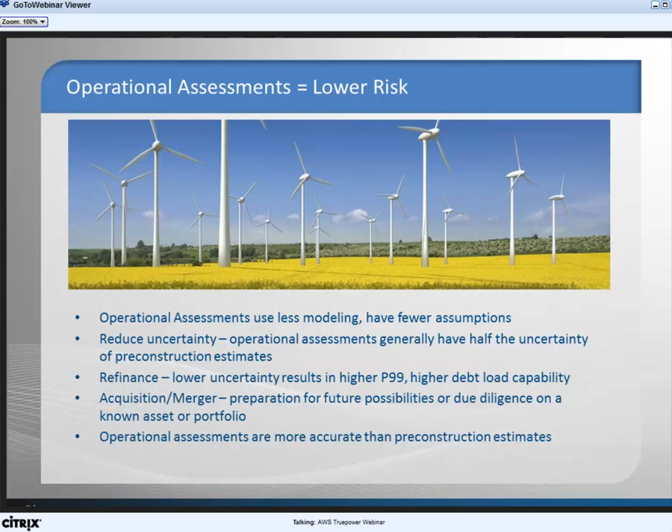Another driver we are seeing is very strong activity in the mergers and acquisitions market, where owners are packaging up wind and solar farms with more accurate energy estimates and selling them as a portfolio with an overall lower uncertainty. There are a few interesting market trends that are leading to strong M&A activity and market consolidation. The most prominent factor is the pending expiration of the PTC at the end of this year. Now with the election over, hopefully the coming weeks will lend more insight into the status of the wind tax credits, but the uncertainty looming over the wind industry has led to reduced pipelines in 2013.

On the other hand, market uncertainty aside, the wind market is actually becoming more attractive to larger, risk-averse companies and more traditional investment methods. The market is becoming more mature and has a track record now that allows insight into performance and potential risks. The cost efficiency of the technology is improving, while the demand for many companies to include renewable energy as part of their portfolio remains strong. This is leading to large, established companies increasing their share of the market, or in some cases entering the market, through acquisition of wind assets or companies with wind assets.

While the solar market is not experiencing the same level of uncertainty regarding government policy or the same level of M&A activity, many of the solar assets are packaged together with wind assets in portfolio acquisitions. In fact, adding solar assets to wind portfolios can further decrease the uncertainty of the entire portfolio as part of the portfolio effect. As Lisa mentioned, this will be a topic we'll cover in depth in our next webinar. So, whether it's a plant refinancing or a straight acquisition, a new operational energy assessment should be conducted in order to provide a more accurate picture of the energy production and reduce overall uncertainty.

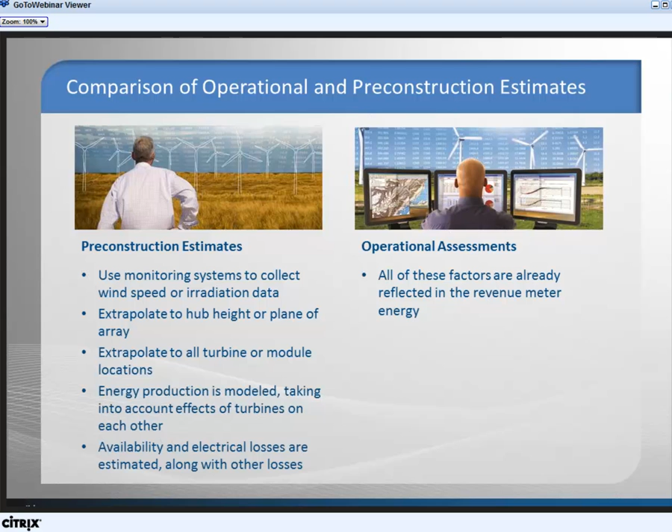The revenue meter data at each turbine provides insight into all of these factors, and therefore, the uncertainty moving forward is greatly reduced. So, Brian, can you take us deeper into the analysis? When in the project life can we do an operational assessment? Well, Josh, some types of operational assessments, such as performance testing, can begin as soon as the plant's operational. The type of assessment we're going to discuss today requires that the plant be operating in a stable manner.

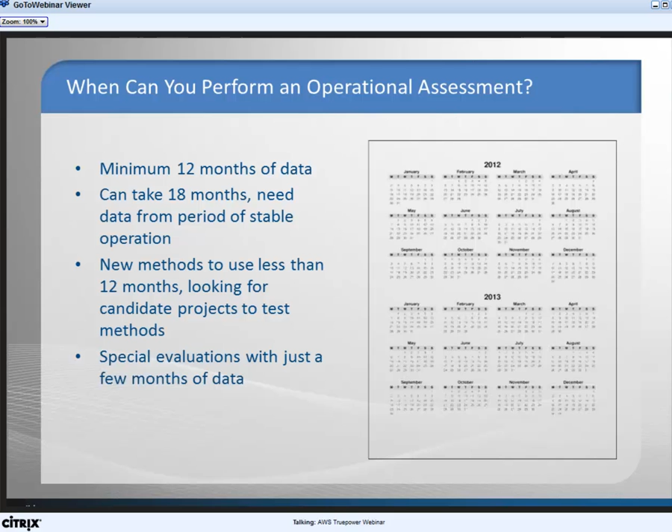Just like resource assessments that are conducted before the wind or solar project is built, operational assessments generally require 12 months of data. However, if you consider the initial plant downtime and startup issues, commissioning issues and such, it might take up to 18 months of operation to get a year's worth of usable data. The same is true for solar projects. It might take more than 12 months of data collection to generate a complete one-year data set. For example, a larger project might be commissioned in several phases, or regions with snowfall may lead to gaps in the data records. Let's look at the information that's required to do an operational assessment.

As we mentioned a few slides back, revenue meter data is one of the primary building blocks that we use in our operational assessment. In addition to the revenue meter data, we need availability data, not just the turbine availability, but the measurements from the SCADA system used to calculate the turbine availability. The turbine warranty agreement makes distinctions for categories of time or energy that do and do not count in the contractual availability definition. We use this turbine availability data to calculate a plant level availability that takes into account the lost time or energy that might not necessarily count against the turbine manufacturer, but is needed to determine the time or energy actually lost during operation.

What we really need to know is how much energy could have been made, as if the project were fully operational. In order to determine this, we need to account for all the time or energy lost, not just contractually allowed time or energy. Now, we've mentioned both time and energy types of availability accounting. Many turbine manufacturers are now accounting for energy lost, not just time lost. Energy-based parameters yield a more accurate regression for this type of analysis than the older time-based parameters.

Why is energy more accurate? It's because time does not equal energy. The energy lost during an hour when the turbine is down for maintenance, when the wind is only blowing at 2 meters per second, is probably 0 megawatt hours. But the energy lost when the wind is 15 meters per second will be much higher, probably the full rated capacity for all the turbines that happen to be offline. But one of the things to take into consideration is that these energy-based parameters can be biased if they're using the advertised power curve. Energy loss calculations will be much more realistic if they're based on the average of the power curves from turbines tested at that particular site.

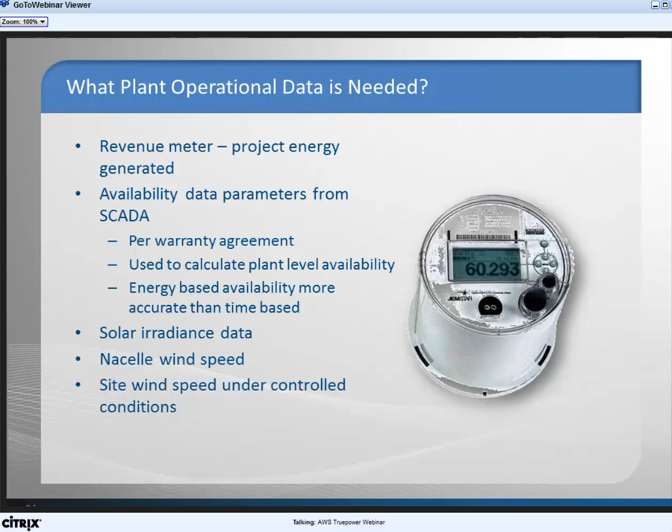We also look for temperature and wind speed measurements, as they are key elements in the analysis. The maintenance practices on the instrumentation itself are also evaluated to ensure good data quality. Operational reports are also another important input, other than the actual operating data.

Good operating reports summarize project activities. They provide information on what actually happened at the site during a given period. Reports on a monthly basis are the most common. Turbine and module as-built coordinates are required, so we can include them in our report. The coordinates do not necessarily play into any of the calculations. We simply use them to show the farm layout in relation to the local topography, and also to show the relationship of the equipment to the on-site meteorological instrumentation.

Finally, we need our reference station data. The client is only involved with this aspect if we're using his on-site data. Otherwise, we evaluate different sources of public and private ground-based or model data for use for our reference stations. If we're using on-site meteorological data, we also need the commissioning forms for the equipment that was used to collect the data. It helps us understand what equipment was used and allows us to verify that the equipment was properly set up.

For solar projects, pretty much the same requirements apply. We like to see the operational reports and the commissioning documents for the plant equipment as well as the meteorological equipment. As far as solar reference data goes, we're looking at the same parameters. Ideally, we look for reference stations with good quality solar radiation, temperature, and wind speed measurements.

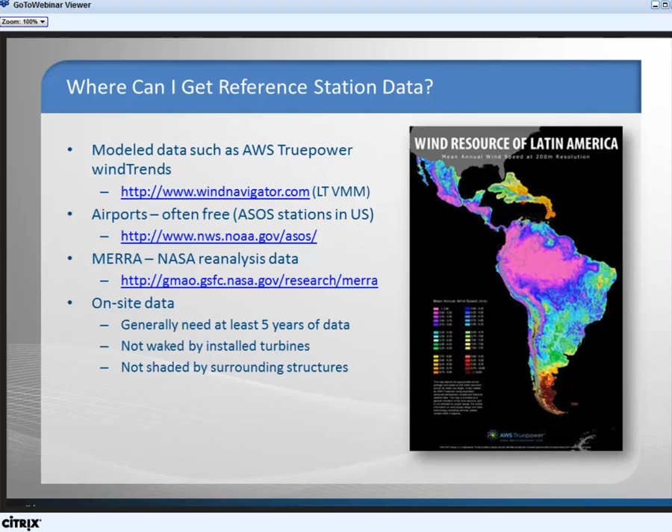If considering on-site met data, this becomes one of the most important checks. You need to confirm that the wind speeds before and after the installation of the wind turbines are not significantly impacted by the wake of the turbines. And that's done by looking for proper tracking and correlation with some off-site regional reference.

We've talked about all the data inputs. Now let's discuss how they're used to generate an energy estimate for the site. Here's the 50,000-foot view. We make corrections to both energy and wind speed to make them representative of their full potential, normalizing to allow the best use of our linear regression. For energy, this means we're correcting for availability and curtailment, and that's to arrive at an idealized energy as if the farm were operating at 100%.

For wind speed, we make an adjustment to account for seasonality, the differences in temperature and pressure as compared to other times of the year. Now, this regression could be done on any of several different timescales, depending on what data is available. So let's look at the different analysis periods we could use.

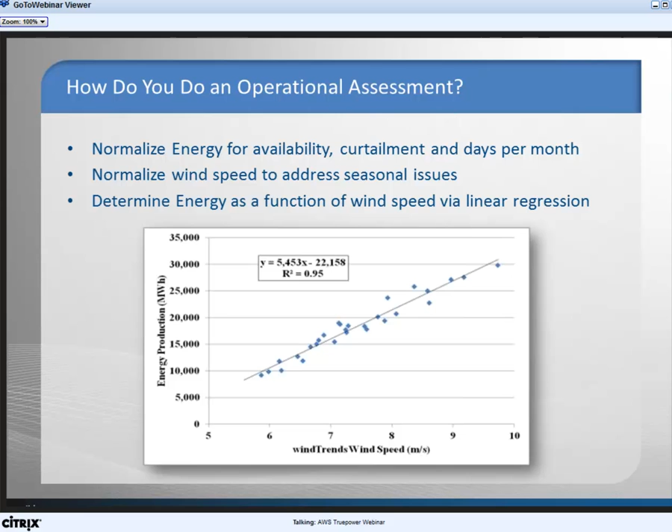For us, we found that the use of monthly data is the best, and it's primarily for 2 reasons. First, it's most often the data that's available. A lot of times we're in a data room. There's summaries available in monthly reports, especially for finance jobs, and it's the information we're most likely to come by.

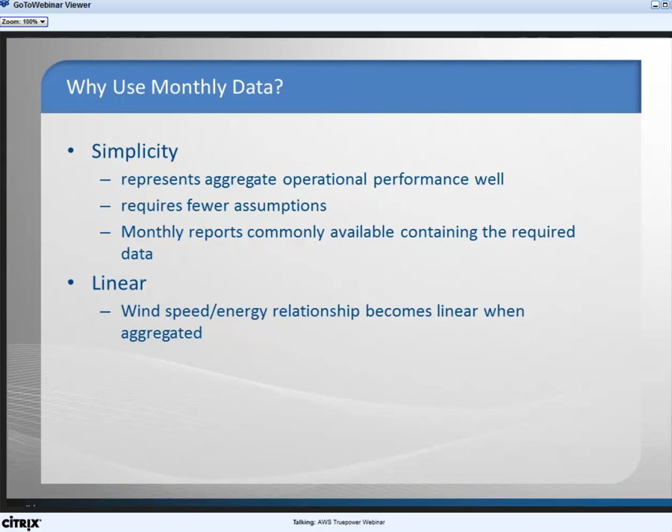Second, because the analysis can be done with a simple linear model. This is easier to look at. This is easier to understand if you're actually looking at some graphs. So let's look at some examples.

Here's just 6 months worth of wind speed and energy data from an example wind farm summarized in 10-minute, daily, weekly, and monthly intervals. It is clear to see that the monthly and weekly data are linear. That's the 2 on the bottom. And that the daily and 10-minute data follow the power curve, and that's more represented by the S-shaped curve that you would see for a turbine.

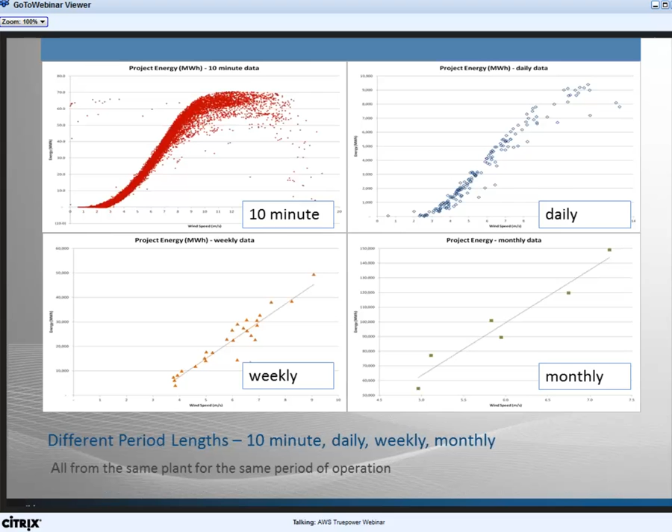As Josh explained in the beginning, our reports are often used for refinancing or to establish equity value as part of an acquisition or merger. It is important that the method used be understandable and comparable to industry norms. Our operational assessment is designed with these key factors taken into consideration.

There is more variation in the weekly time series data than there is for monthly data, and that's just because it's averaged over a longer period of time. For this analysis, we're basing future estimates on the fact that the period used is representative of similar periods of historical data. The monthly data best supports this assumption.

Now, we've discussed the data that's used. Let's dig a little bit deeper and talk about the mechanics of the analysis, how the process works, and how we're actually going to do the adjustments and calculations. So how does the process work? The process can be generally described, and we actually describe it the same way for our pre-construction estimates, as measure, correlate, predict. And some of the major steps for each one of those is outlined next to each one of the topics.

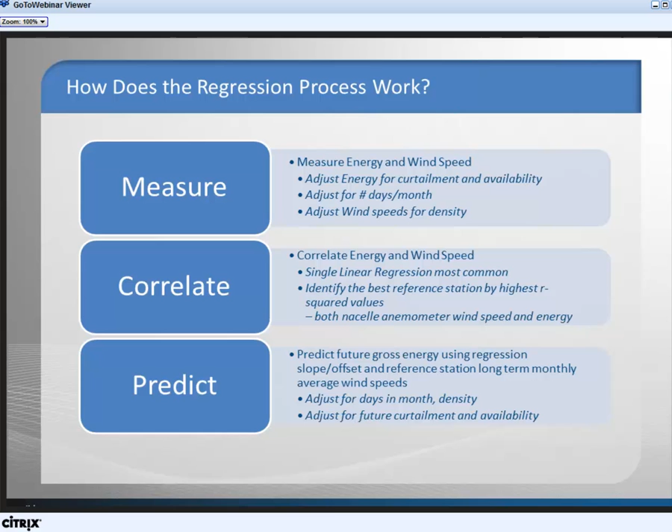Both wind speed and energy data in the raw form are useful. As we discussed, adjustments need to be made to remove the influences that are known to cause the regression model to be weaker and less accurate. We're going to be covering those in the next few slides. Let's start off with availability. Adjustments, they're just made through a series of simple calculations.

To adjust for availability, simply divide the actual energy produced by the plant availability. Note that it might take some work to get good plant availability data. That's different than turbine availability, and we've already touched on this. To adjust for curtailment, if there is any, add it back to the monthly value, which we already have after we've corrected for availability.

Finally, to adjust the energy for the number of days in the month, multiply by a standard month length. We've used 30, as you can see in this formula here, and divide by the actual number of days in the month. This removes the length of the month as a source of variability in the regression. These are the only major adjustments that are made to the energy data used in the regression. There are special cases where energy loss for other reasons is tracked separately, but they're outside this more basic discussion.

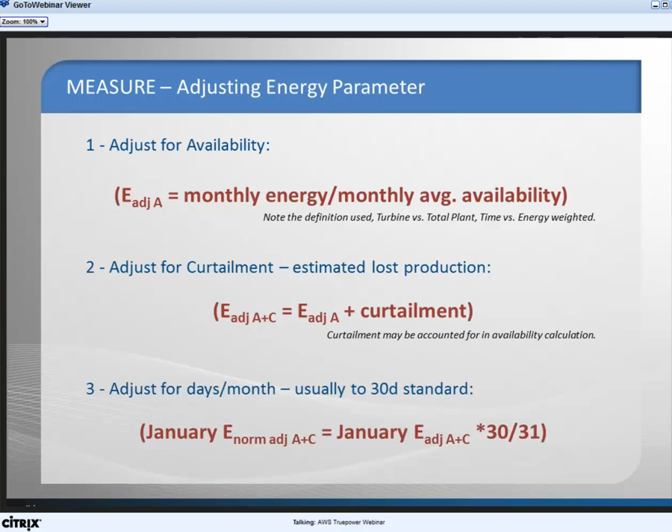Now that we've made the adjustments to the energy, let's look at how seasonality can be addressed by making adjustments to wind speed. Now, in this calculation, V is for the wind speed or velocity, and rho is the density. If the density for a 10-minute record is higher than the density for the long-term average, the effect is an increase in the wind speed under the IEC calculation used in turbine performance testing. What we've done is taken the exact same formula, and instead of 10-minute records, we've applied it to our monthly data.

Simply put, denser air means that there's more energy when compared to less dense air. To normalize for density, when the only parameter is wind speed, you have to take wind speed and raise it slightly for the measurements taken with the denser air. And this equates to more energy when compared to the turbine response. It's a minor adjustment, but this has been shown to reduce the influence of temperature and seasonality on data used in the regression. And it usually results in both a lower error and higher correlation and coefficient of determination.

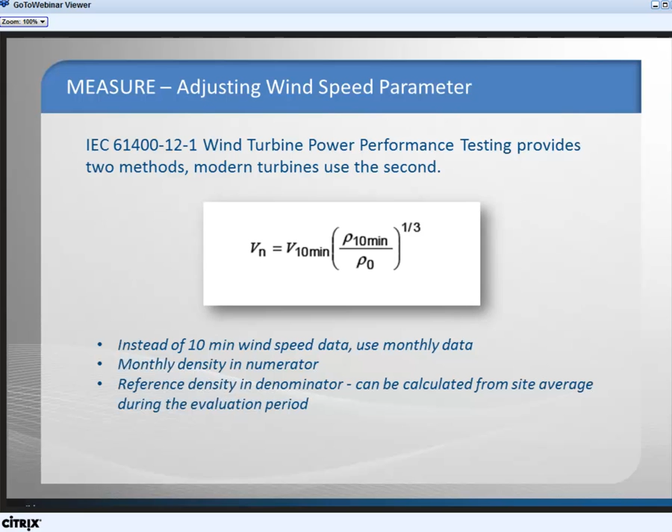In this case, the left-hand view is similar to what you would see in a single regression, and it's clear the data is tightly grouped vertically, showing that it's associated tightly with both wind speeds together. Now, if we spin it, that allows us to look at the wind speeds on the two axes, one to the right and one to the left. The one to the right is actually a ground-based station, and the one to the left is a modeled set of data. That's actually our windTrends data.

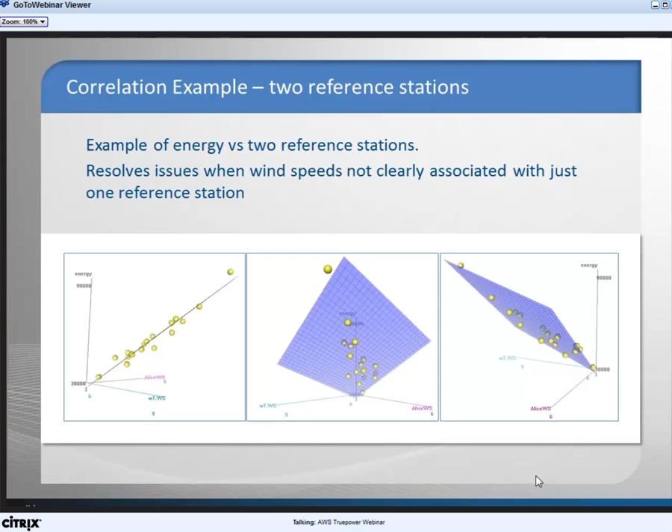Sure. I think it's helpful to understand some of the basic features of this type of analysis. Many of the observations seem intuitive, especially when considering the interplay of different sources of information. The fact that the corrected data has a stronger correlation than uncorrected data is intuitive, especially now that we have an understanding of why the correction was made. If you are doing this type of analysis with your own data, you should see similar results. If you don't, go back and check your adjustments. Make sure that the potential reference stations are properly aligned with the energy data.

It's also usually the case, the closer you are to the actual wind energy interface, the stronger the regression. Using turbine energy should result in a stronger regression than revenue meter energy, which makes sense because the variations in electrical losses are excluded. Another point, the wind speed aggregates from the nacelle anemometer will most likely result in the strongest regression with energy, but since there is no historical data, they can't be used for energy projections. But the nacelle anemometer wind speeds should correlate nicely with the reference station selected, as should the energy data. Of course, there are exceptions, but they are rare and often explainable once you dig into the data.

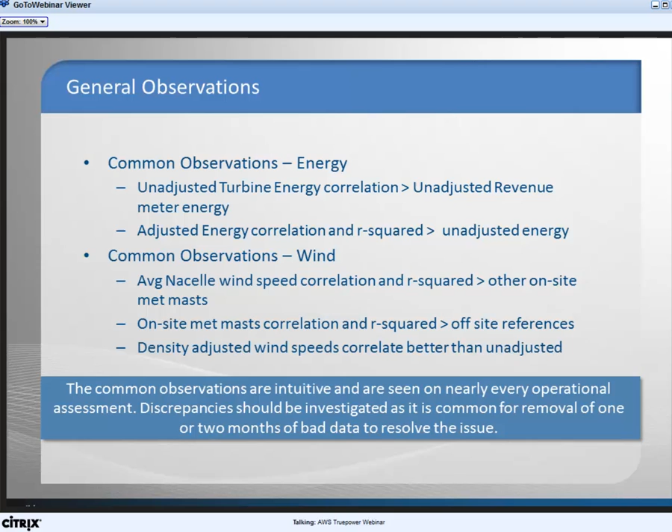So, Brian, how exactly is the regression used to predict energy? Well, for that, you got to remember back to your algebra days, and we're going to go to the good old formula y equals mx plus b, where m is the slope and b is the intercept. The regression model that we've used has given us these same terms. We simply input the average long-term monthly wind speeds from our reference station, adjusted for long-term average density for that period. In the beginning, we discussed normalizing to 30-day periods.

Now we need to undo this adjustment and scale the months to their appropriate lengths. Once this is done, we can sum the monthly gross energies. The end result, when we sum these monthly gross energies, is an annual gross energy that has taken seasonality into consideration, but we still haven't addressed availability or curtailment yet.

So far, we focused primarily on wind project operational assessment. So we're going to take a minute and have a look and talk about the similarities and differences with solar projects. Solar plants experience two types of degradation: an initial power output stabilization period during the first few hundred hours of operation, and then separately, a degradation of performance over the project life.

Initial stabilization is usually included in the module nameplate power rating, but this loss is not included in this analysis. We actually want to skip it because the loss is already accounted for in the actual operating characteristics of those modules. The long-term degradation rates are applied in a similar annual fashion as pre-construction estimates.

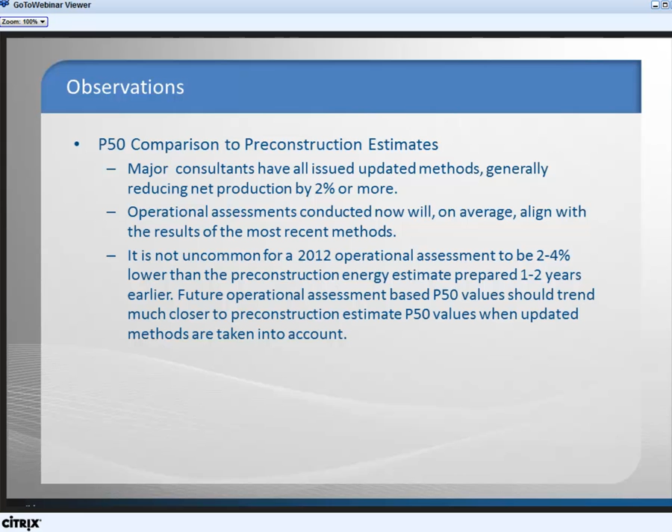These adjustments and the adjustments of other consultants in the industry have generally been downward. That is to say, a projection done now for a farm originally assessed a year ago could be 2 to 4% lower in energy if assessed today. This is seen in the results of our operational assessments. It's not uncommon for us to project energy 2 to 4% lower than a pre-construction estimate prepared, say, 1 to 2 years ago.

Now, while the P50 long-term annual energy estimate might be slightly lower than the value reported in the pre-construction estimate, the use of actual revenue meter and plant operational data removes several points of uncertainty, resulting in a significantly lower long-term uncertainty as compared to the pre-construction estimate. The net effect of a more accurate P50, in addition to a lower uncertainty, is generally seen as a higher P90 and P99, all other issues remaining constant. A plant that is performing poorly can't hide behind these common observations.

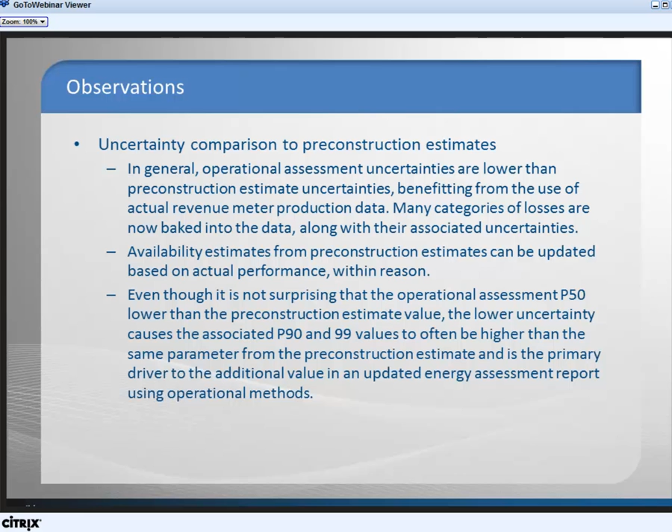So, Brian, can you discuss the recent advancements in our operational assessments? Sure. And this is one of the last points we're going to touch on before we sum up and start taking questions. But as far as new methods go, one of the things that we've been looking at is, can we actually use less than 12 months of data? As we said earlier, we need about a year's worth of data to make this operational assessment method work. We also discussed that it can take up to 6 months for the wind farm to actually reach mature, stable operation.

Well, this means that 18 calendar months could have gone by before there's enough data accumulated to perform an operational assessment, and that's under our current methods. This means that the decision to refinance or to take an equity stake would still need to be based on pre-construction methods for a farm, even if it had 16 to 18 months of data. We're refining our methods, and we've been working on ways to allow fewer months of data to be used to deal with this issue.